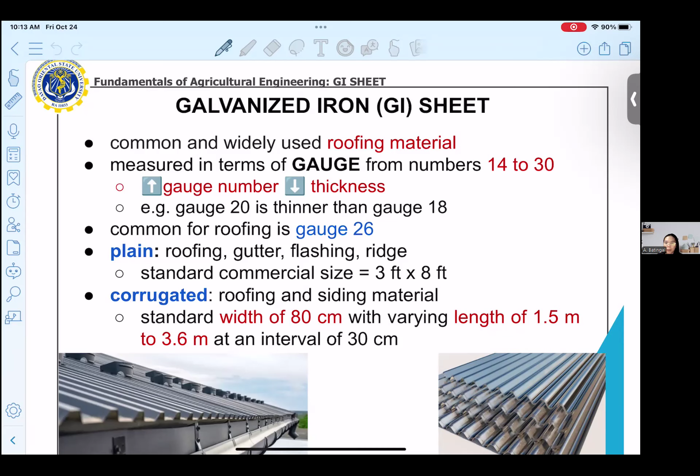So the commonly used roofing material here in the country is your galvanized iron sheet. So if indigenous naman, you have the nipa. Pero generally, the commonly used and widely used roofing material is your galvanized iron sheet. Now, your galvanized iron sheet is very popular primarily because of its cost.

So compared to other roofing sheet materials, it is cheaper na your cost, despite medyo mahal siya compared sa indigenous one, but it is also readily available, no? In many hardwares, your galvanized iron sheet is typically readily available, and also it is durable with its material and with the ease of installation.

So you just need the screws or mga rivets to fasten it or attach it on your purlins or sa imuhang roofing structure para complete na imuhang structure with regards to its roof. Now, your galvanized iron sheet, take note that it comes in two types. So we have your plain galvanized iron sheet and also the corrugated galvanized iron sheet.

Now, your plain galvanized iron sheet is commonly used kapag sa mga gutter. So, say for example, kani siya na part ni sa mga gutter, sa mga flashing, sa mga ridges sa ibabaw sa imuhang roof. So, typically, ang ginagamit ana is your plain GI sheet. Now, your corrugated GI sheet is used heavily sa mga roofing jud and mga siding materials. Kani sa mga roof, corrugated GI sheet.

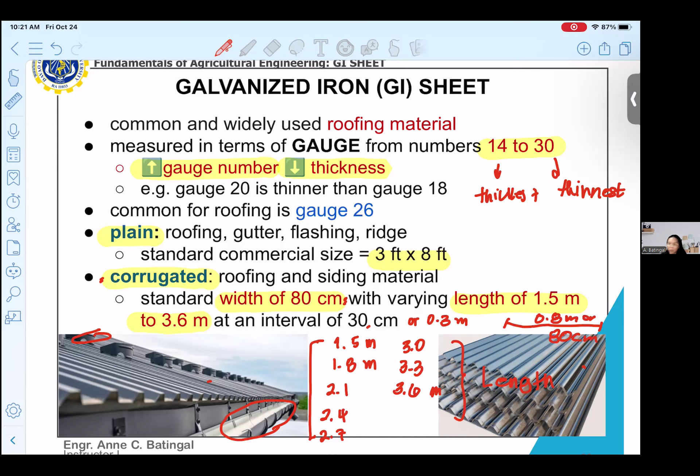The standard width of 80 centimeters or 0.8 meter and the standard length of 1.5 meter to 3.6 meter. So again, mao ni siya ang standard length sa imuhang corrugated GI sheet. Now, with regards to its width, ang standard width niya kay 0.8 meters or 80 centimeters. Okay, so next.

So what you have here is a table showing the standard weight of your galvanized iron sheet in kilograms. Para asa man nga table? So it serves as a guide for you in the future. Kasi minsan manggod, it is difficult. Ginagamit manggod na siya og caliper. I think it's caliper. Wait, let me check the material used. Yes, caliper is used to measure thickness of your GI sheet.

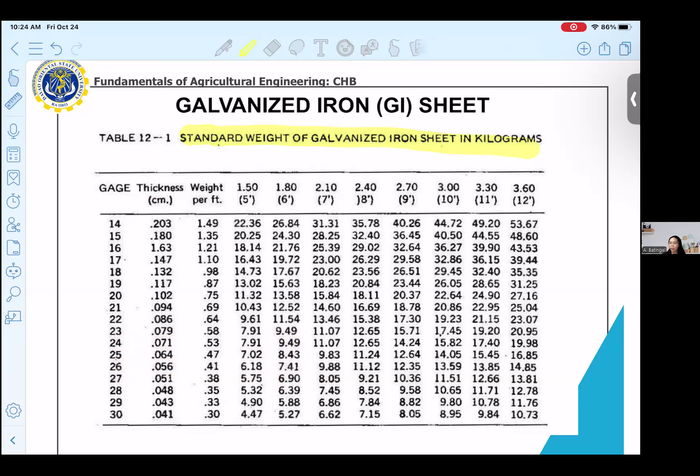Okay, so here we have the corrugated GI sheet lapping. Now, effective installation sa imong GI sheet in your roof includes side and end laps. So, naa kay ginatawag og side lapping and end lapping. Pag side lapping, patong siya. Pag end lapping, end-to-end sa imuhang GI sheet. Again, pag side lapping, say for example, this dalawang GI sheet, ipatong sila gamay. Pag end lapping, ipataas nimo ang end sa GI sheet. Now, overlapping corrugations ensures water tightness and wind resistance. Kasi syempre, dili man pwede nga isiro-siro nimo ang pag-install sa imong GI sheet because there would be leakage.

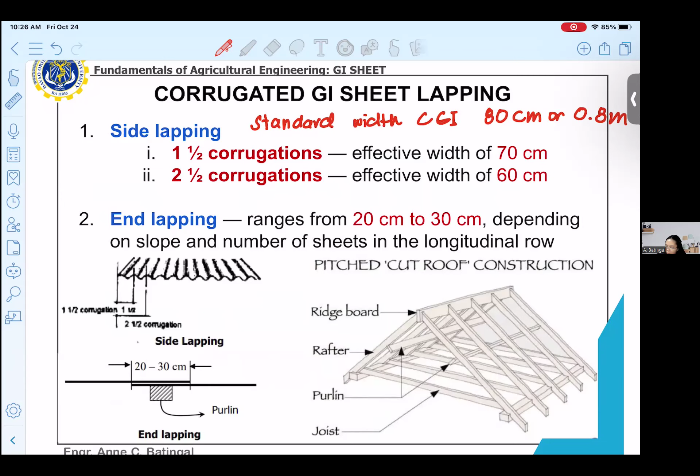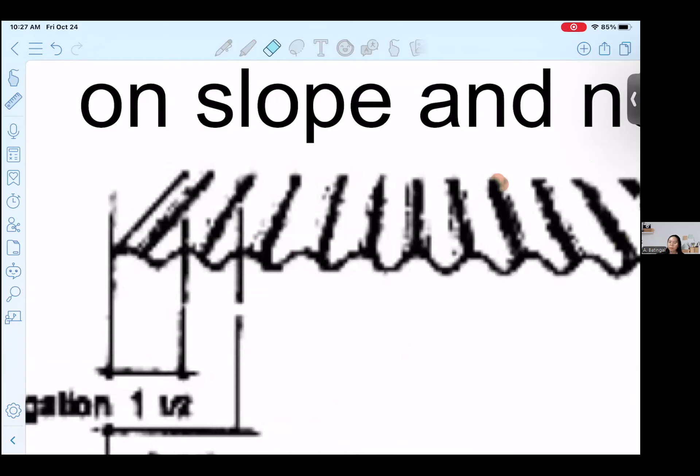Now, if your side lapping is 1 and 1/2 corrugation, what do we mean by 1 and 1/2 corrugation? Ipatong nimo siya, it is 1 corrugation. Wait a minute. One corrugation. Let's use the darker one. Okay. So, 1 and 1/2 corrugation, this is one corrugation, and one half. Isa ka bog and one half corrugation.

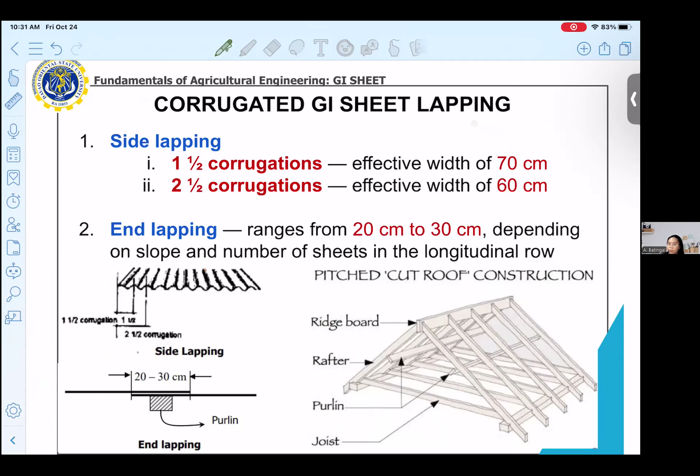Now, ma'am, kung dili ko sila mag-side lapping para makatipid ko og GI sheet? What you should take note is that lapping is important for us to prevent leaks. Kasi pag wala mong lapping, tendency nga mag-leak ang imuhang roof. And also, it prolongs the lifespan of your roof. So, you have to overlap them.

Now, aside from side lapping, you also have your end lapping. Your end lapping ranges from 20 cm to 30 cm, depending on the slope of your roof and the available sheets. Now, unsay pasabot sa end lapping.

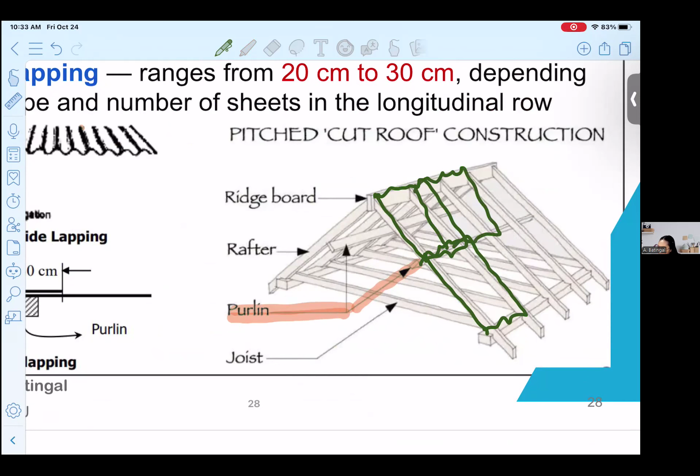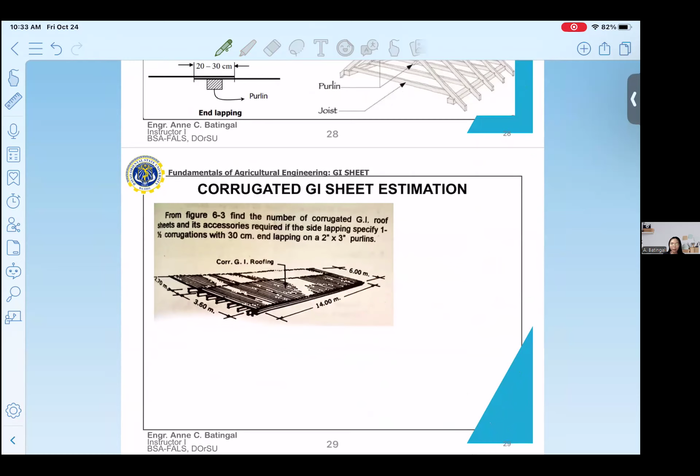Okay, so for us to understand better the estimation, let's have the sample problem. So from figure 6-3, find the number of corrugated GI roof sheets and its accessories. Now, dili na nato i-include ang accessories kasi accessories would entail katong mga rivets or mga nails.

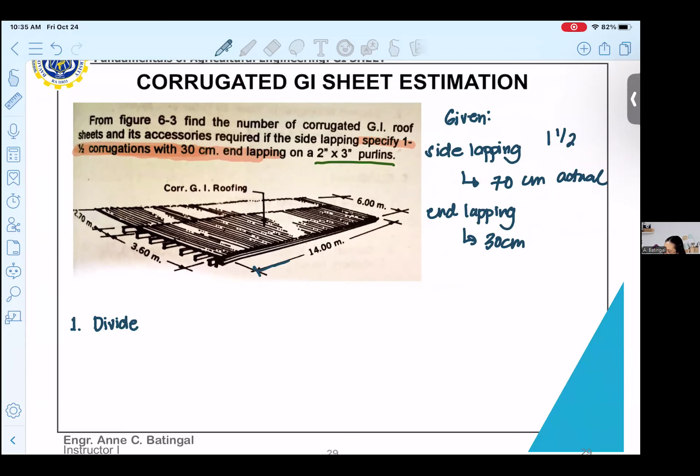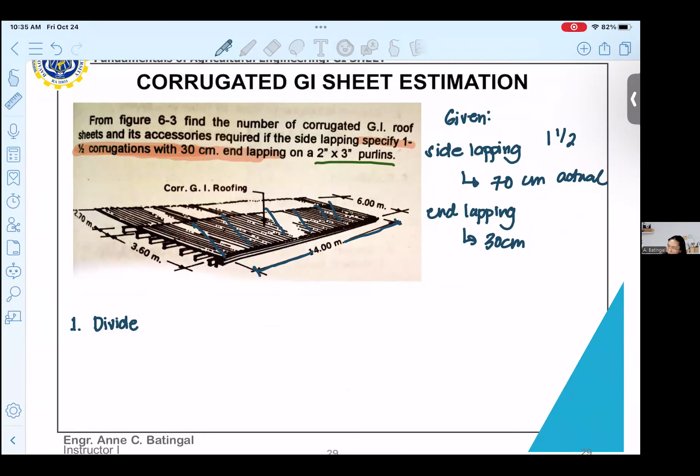Now, divide the length of the gutter over the effective width. Now, the length of your gutter is 14 meters. Now, the effective width of your corrugated GI sheet is 70 centimeters or 0.7 meters. Nganong 0.7 man? Kay ga-mention man siya nga 1 and 1/2 corrugation. So, you write here 0.7 meters. So, 14 divided by 0.7 is 20 pieces of CGI para makover nimo ang kaning 14 meters na part.

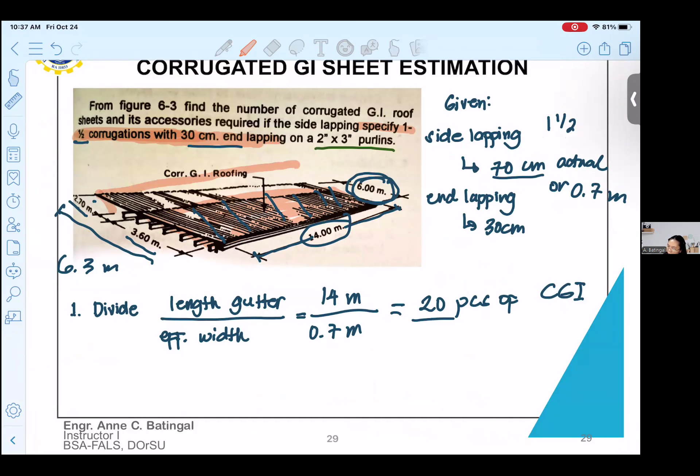Therefore, the number of CGI you need to purchase is 20 pieces CGI with length nga 3.6 meters and 20 pieces of corrugated GI sheets with length nga 2.7 meters.

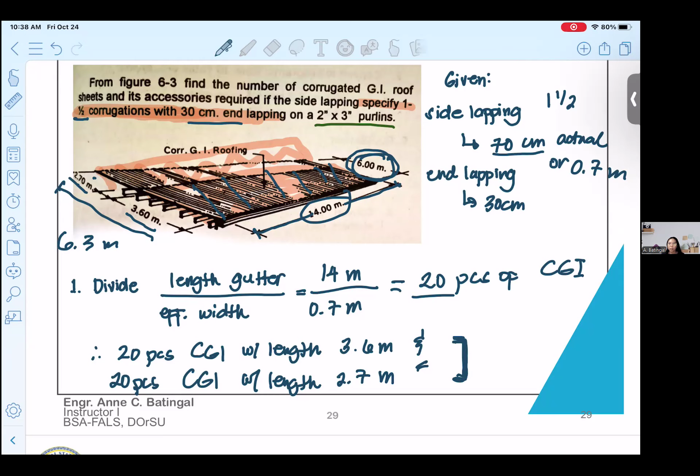Now, as to the gauge number, it's up to you kung unsa imong kasya sa imong budget, pero it's not asked man sa problem unsa na gauge number. Pero again, you should take note that the higher the gauge number, the thinner your corrugated GI sheet will be, or your GI sheets in general. So that's it for a very, very basic rough estimation on corrugated GI sheet.